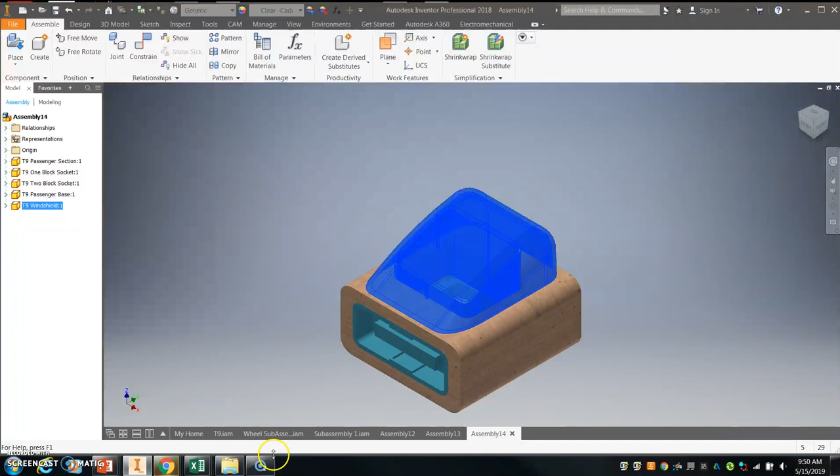Okay, so I wanted to just show everybody how you can actually assemble the third subassembly for the Automoblocks assembly. So first thing that I'm going to do is I'm going to place in the passenger base and the 1 block and 2 block sockets. Okay, so I'm going to go to File, New. I'm going to start a standard IAM assembly.

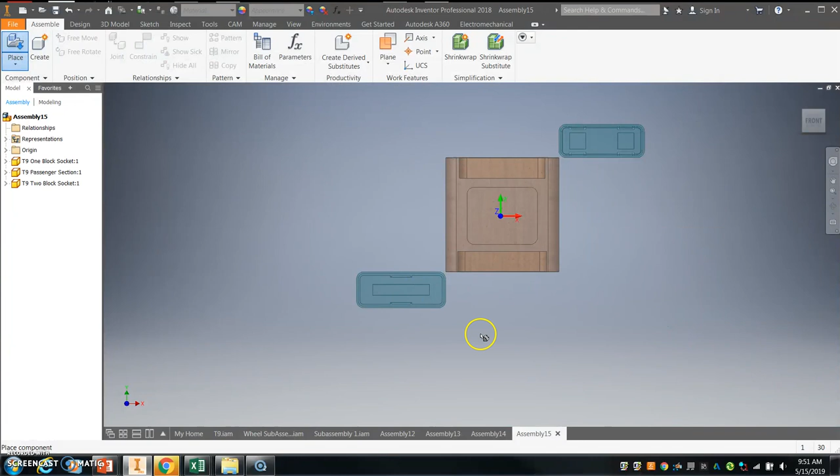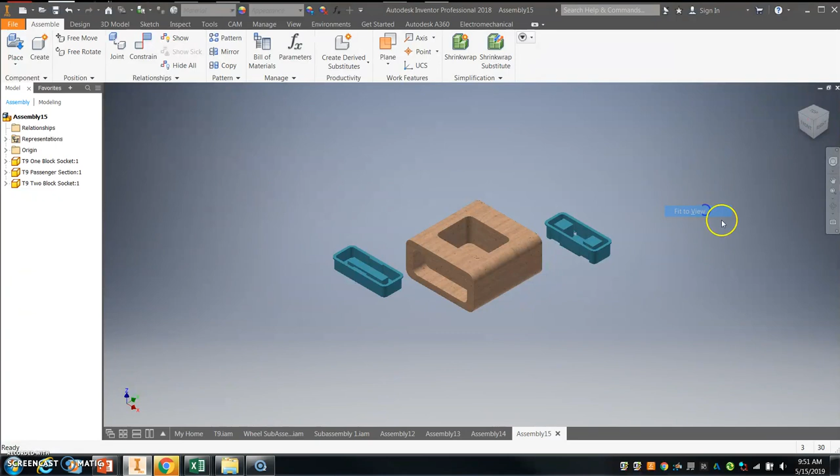I'm going to place the passenger section, and I'm going to hold the control button to get the 1 block socket and the 2 block socket, and I'm just going to place one of those. So if I'm looking at this, what I want to do is I want to make this the front of my vehicle. So I'm actually going to change the orientation. I'm going to set that as front. I'm going to click on the upper right hand corner, right click, set current view as home, fit to view. So now that will automatically size the passenger section right here.

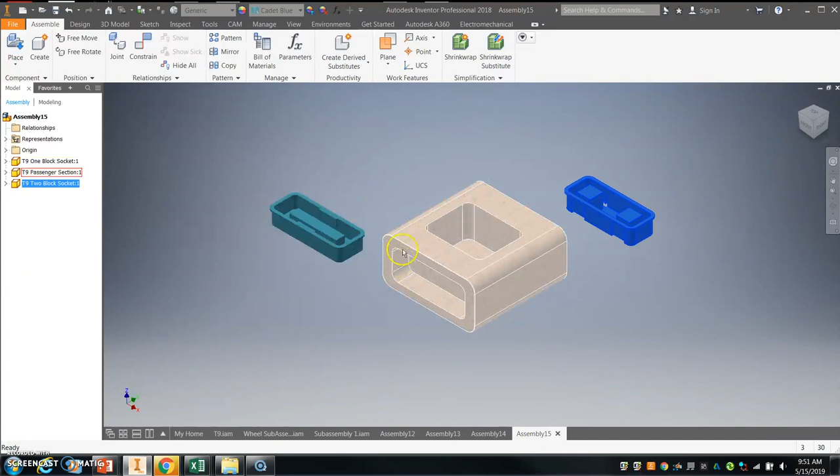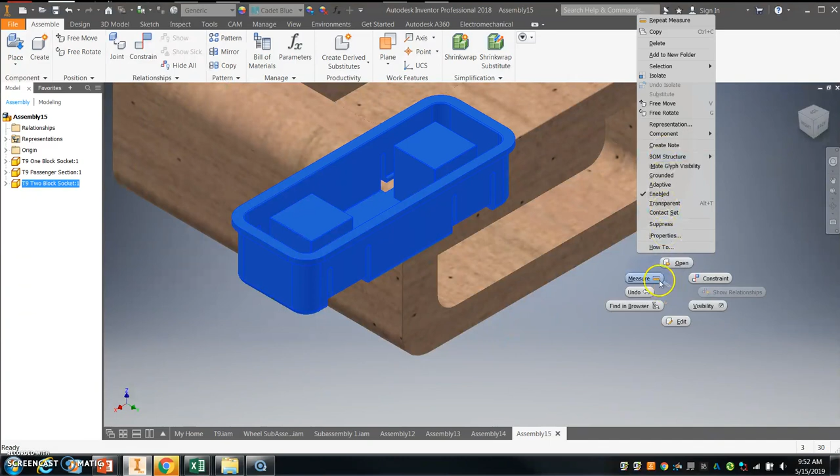So this 1 block and 2 block socket actually have two different sizes. So the 2 block socket is actually 2.4 inches across and the 1 block socket is 2.5. So in order to figure out which side each socket needs to go on, I'm going to right click, measure. I'm going to measure from here to here. And this is the 2.5 inch side, and I'm just going to double check, make sure that this one in fact is 2.4. From here to here, 2.4, perfect.

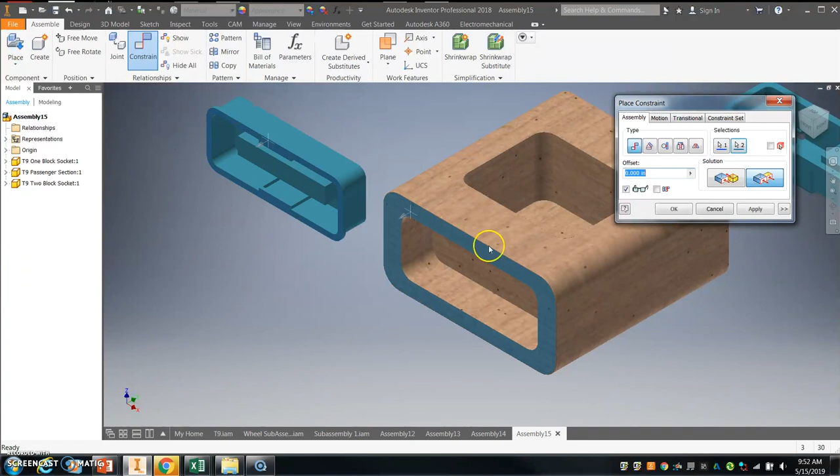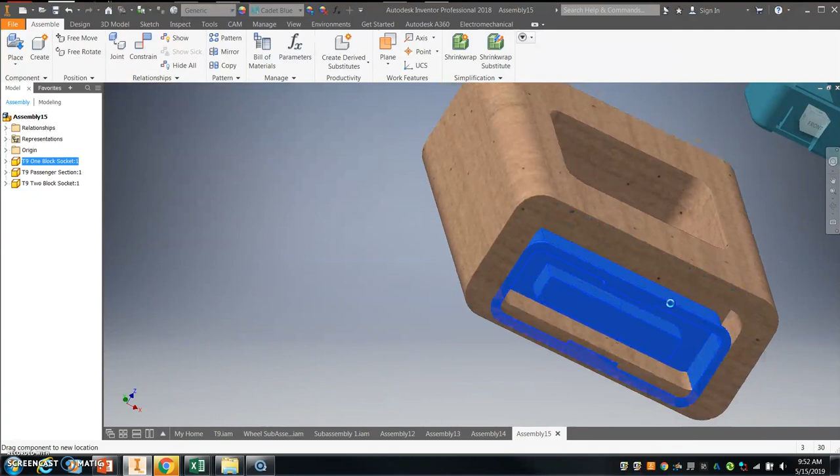So I'm going to place those two sockets in there. I'm going to start by doing a flush constraint. I don't actually have to rotate anything. I just need to make this flush with this. Okay. And then I'm going to mate this little edge here. I know it's a little difficult to see. So this edge right here with this inside edge right here. Hit apply. And now this should only be able to basically move up and down. I'm going to ground this one really quick. So this should be able to move up and down, and now I need to stop it from moving up and down in that Z direction.

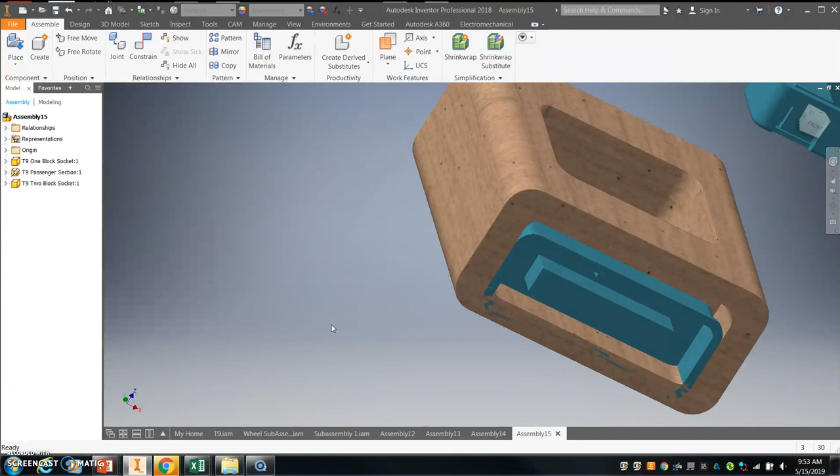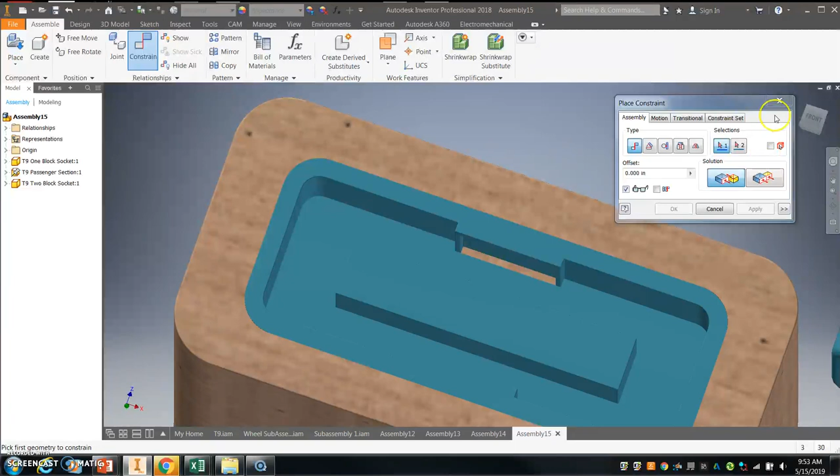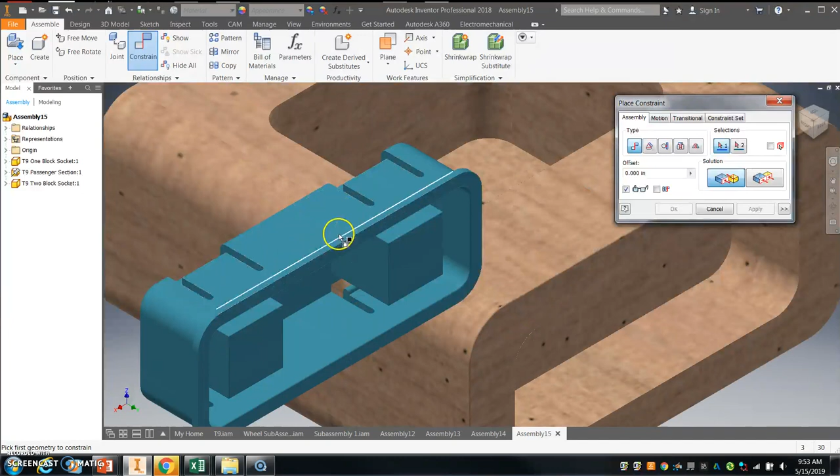The whole point of creating an assembly is so that way all of my pieces are constrained. They only move how I want them to move. And in this case, I don't want this connector socket to move anywhere. So I'm going to constrain this. I'm just going to mate this skinny little top surface right here to this surface right there. Hit apply. So theoretically, when I click on this, these should look like they kind of share the same outline right here. Okay, so that one looks pretty good. I'm going to do the exact same command for this side. And those should be pretty well set.

So next thing I'm going to do is I'm going to place the passenger base, which is the plastic piece. You might have the one with all the different shapes on it. That one's totally acceptable and it should fit. If not, you're welcome to download this one from Google Classroom. So luckily when I place this in here, the feet, we'll say, of the people are actually facing the correct way because the 1 block socket in this case is going towards the front.

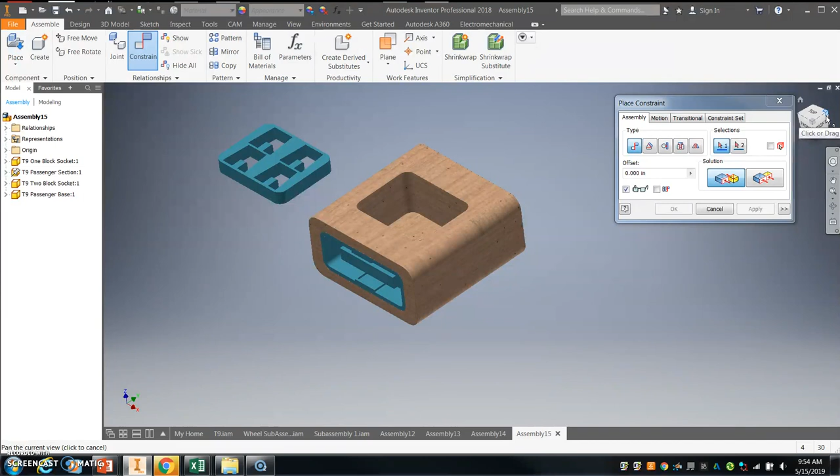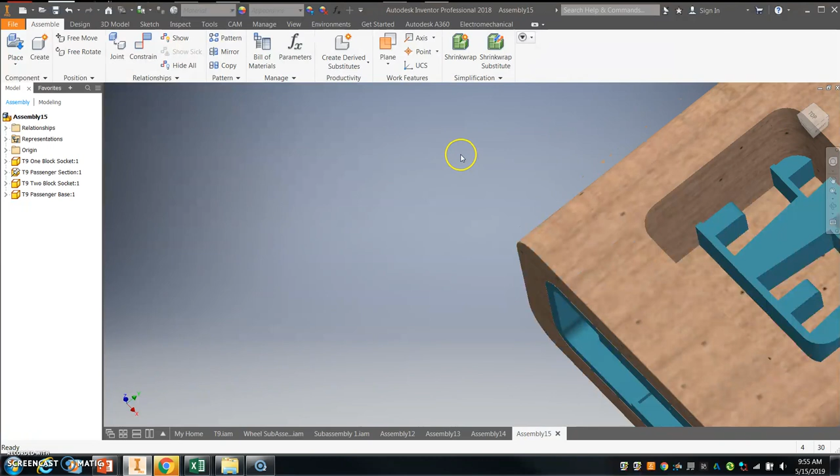So if I think about what pieces are going to actually be touching, where is there going to be a termination? Where is there going to be an end point where the parts can no longer go through? What parts are going to be touching when this is fully assembled? The bottom of this passenger section is going to stop the bottom of this passenger base. And no, it's not going to align it perfectly. It's basically going to say, well, you have one direction that has been constrained. In this case, that's going to be that Z direction. It can no longer technically move up and down in the Z direction. I need to constrain it from moving in the Y direction and in the X direction.

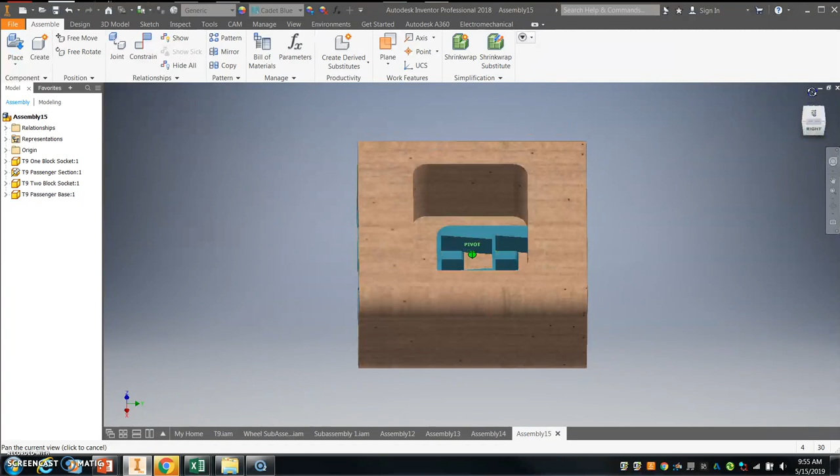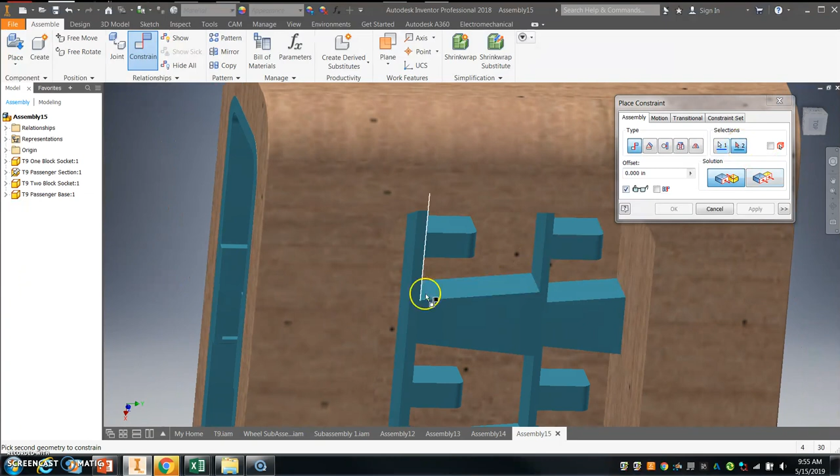And I'm going to do that just like I did with the other connector pieces. I'm going to constrain. I'm going to mate this side, oops, a little too far, to this side. And I'm going to constrain this side to that side. Okay, so I just did 3 mate constraints on there. So that took away all of those degrees of freedom, which is what we were looking for.

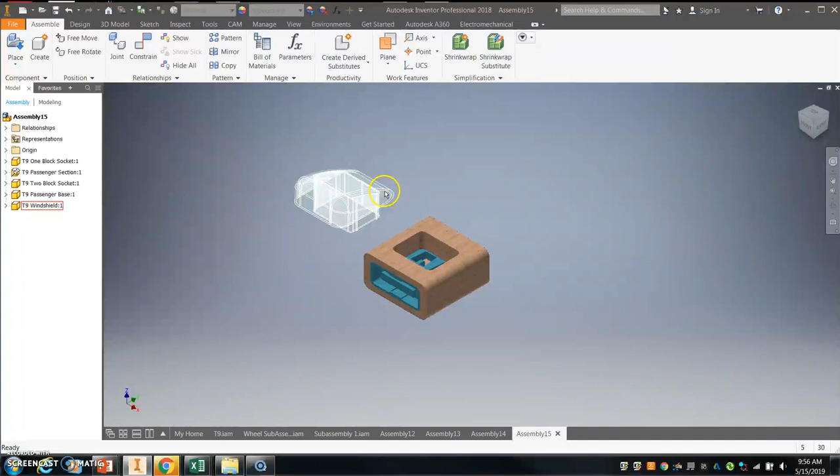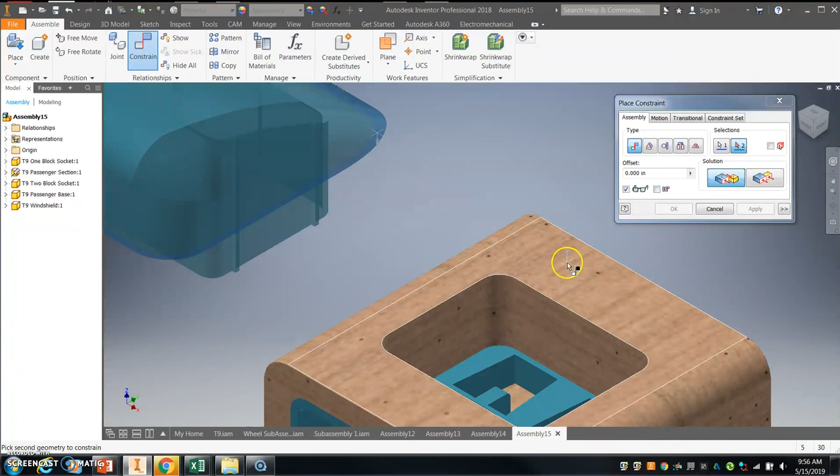So last but not least, I'm going to place the windshield in here. So I'm going to add my windshield and go to open. Okay, so the windshield, this narrower part should actually be facing towards the front. You don't need to rotate anything. If you think about it, when you place the windshield on top of the passenger section, basically the little tiny bottom along the windshield right there, that is what's going to make contact with this piece right here. Okay, so that looks good.

If I start to kind of look at this, what I might want to do is measure some stuff up to see how it's going to fit. So I'm going to go to measure the distance between this side and this side. If I look closely, that is 1.59 inches.

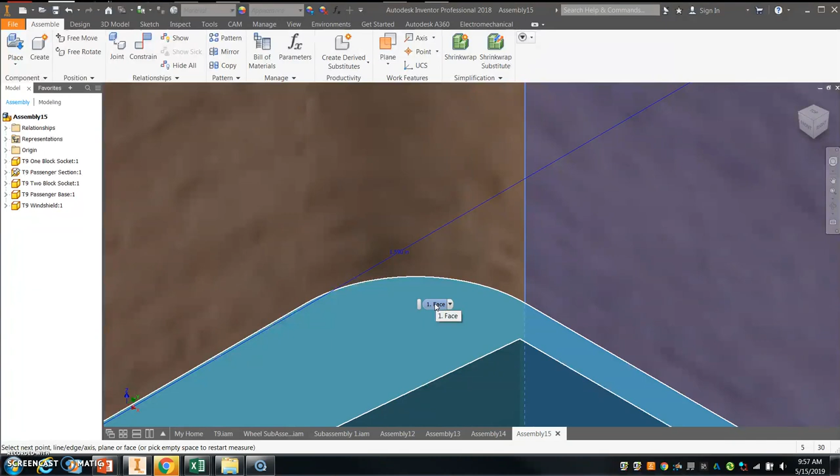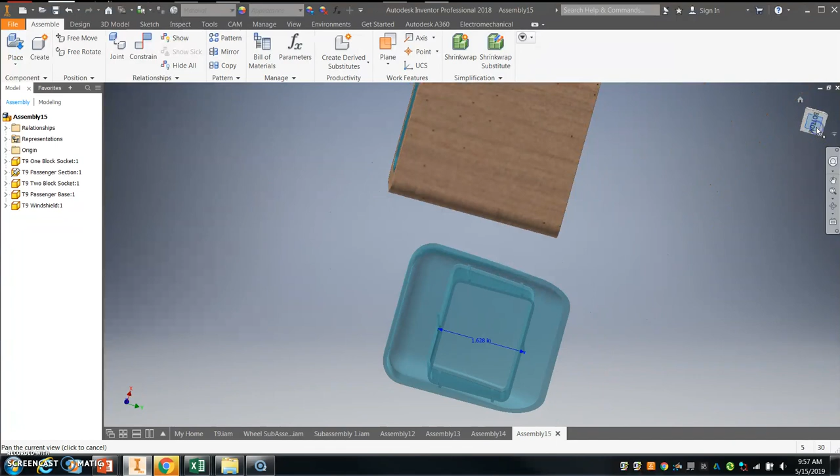So 1.59 inches. So let's take a look at the bottom of the windshield there and see. Right click, measure. Is it from here to here? That is 1.59 inches. Let's make sure that I'm looking at it. Okay. Or is it from here to here? Or is it from basically right here to right here? Okay, so that one's going to be kind of the closest.

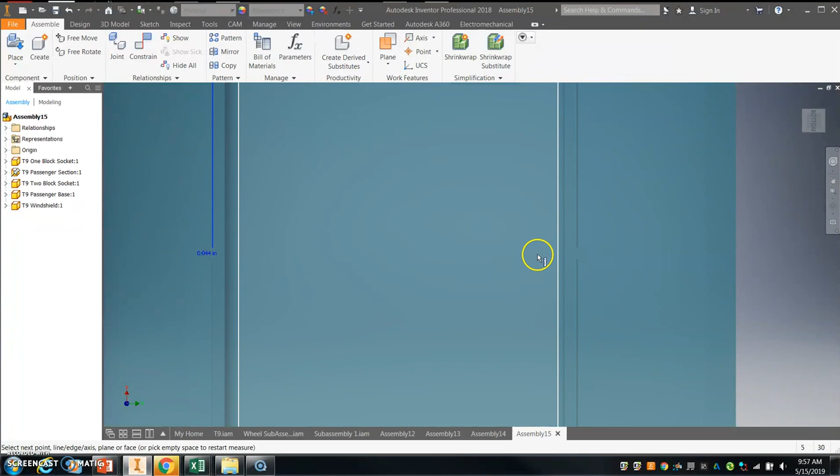So it looks as though these little tabs that sort of stick out, we might have to actually kind of place them. They might be inside of some of the pieces on here. So because the total distance from here to here is technically over. So that's at 1.628 inches. Right, so not a big deal.

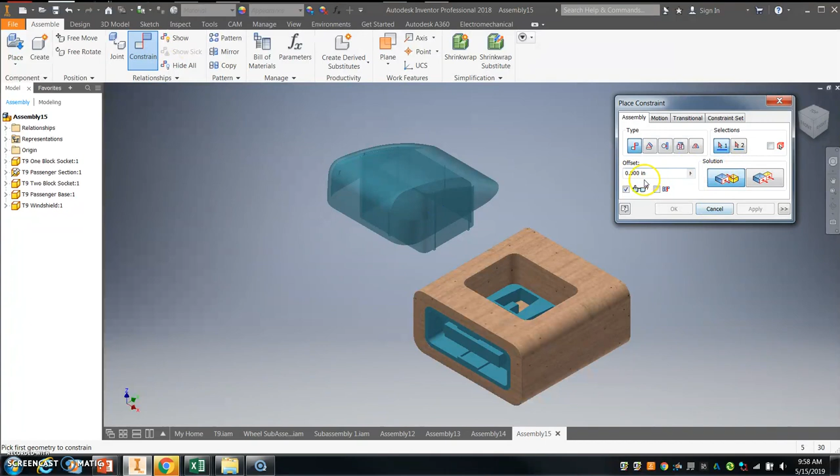What we are going to do is go back to here, and I'm going to constrain. So I want some of these surfaces, and we could even do a little bit of math and make it so it's even. I want this back surface right here to mate with this surface right here. And notice that that actually rotated, okay, this windshield for me. And then I hit apply.

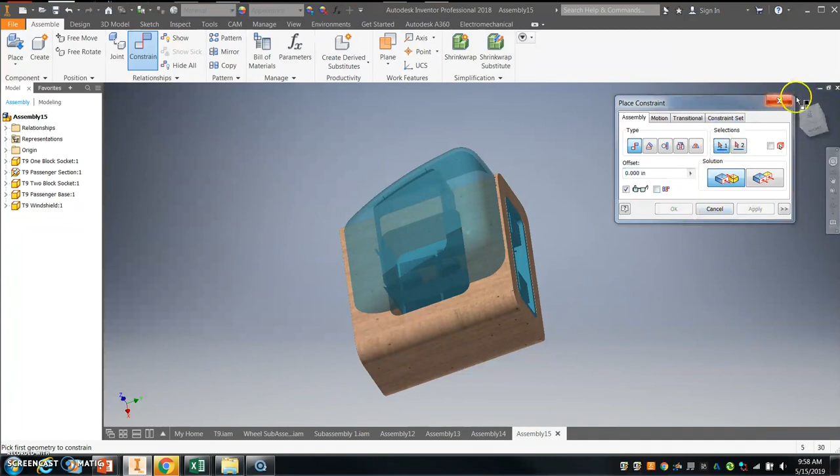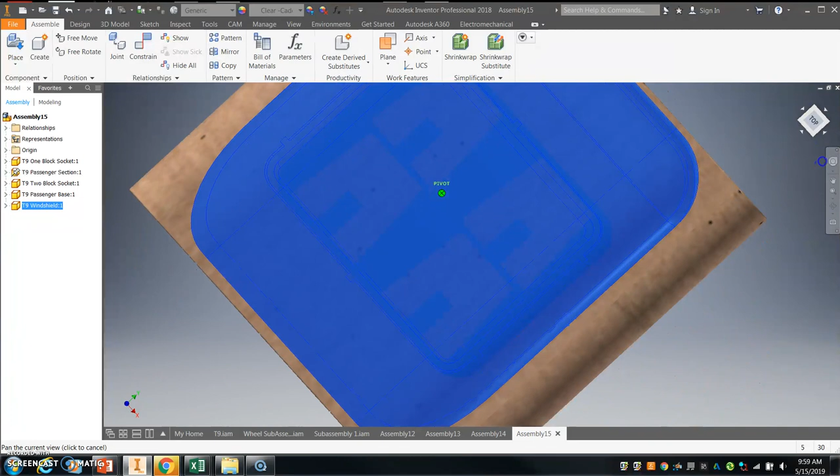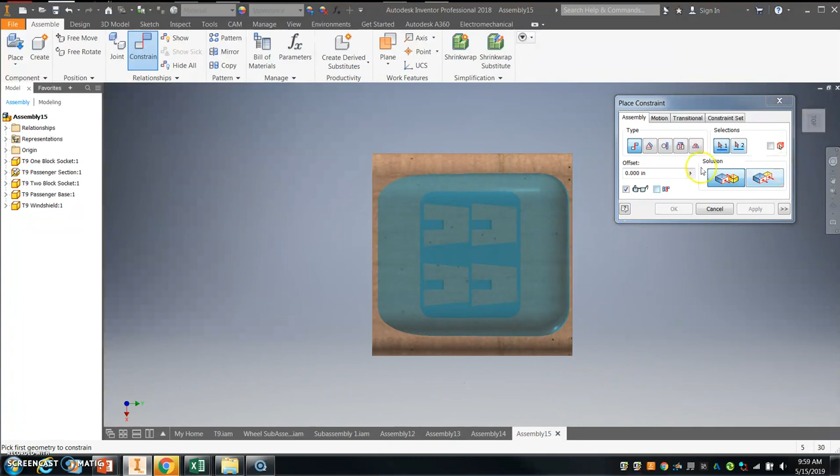So looking at this from the top, I should be able to move this back and forth. And if I click on this right here, it's a little difficult to see. But it looks as though it's aligned pretty well, and that will be acceptable for this. Next thing that I want to do is I want to stop it from being able to move in the X direction. So I'm going to constrain this piece right here to that piece right there. And I'm going to hit apply. So if I look at this from the top, that looks pretty good, looks pretty even.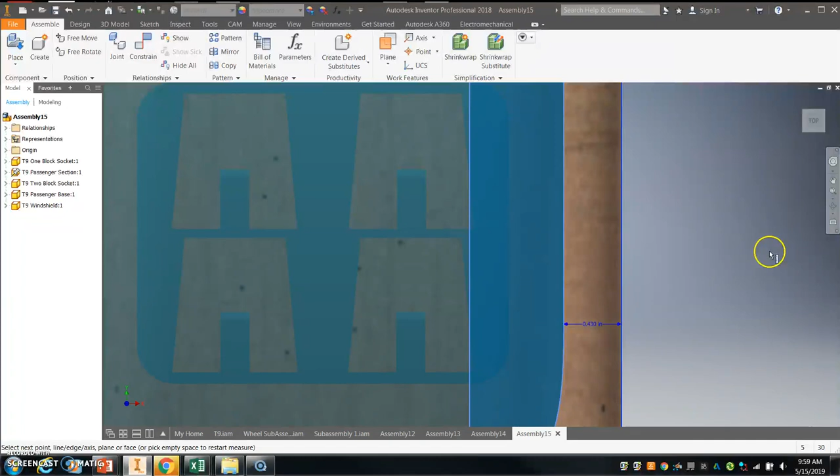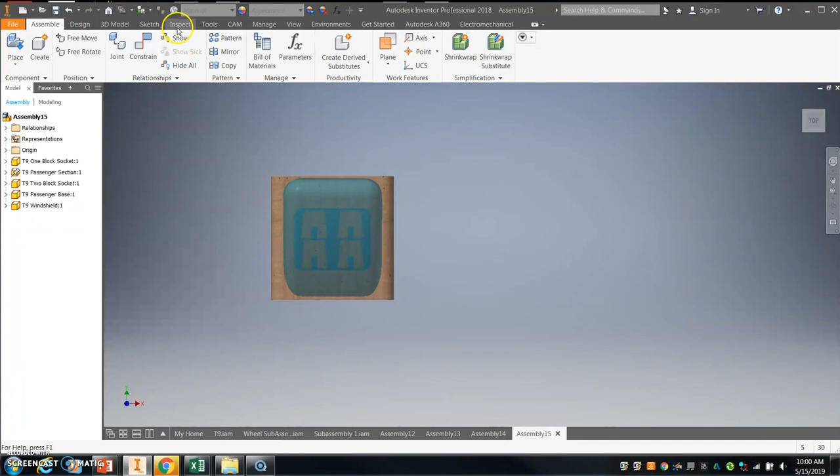What we can do is we can actually right click and hit measure from here to, I zoom in, trying to get this piece right here. So 0.43 inches. And then if I measure from here to here, oh, let's try that again from here. Right click, okay. Measure from this edge to here, 0.433 inches. Okay. So that's pretty good.

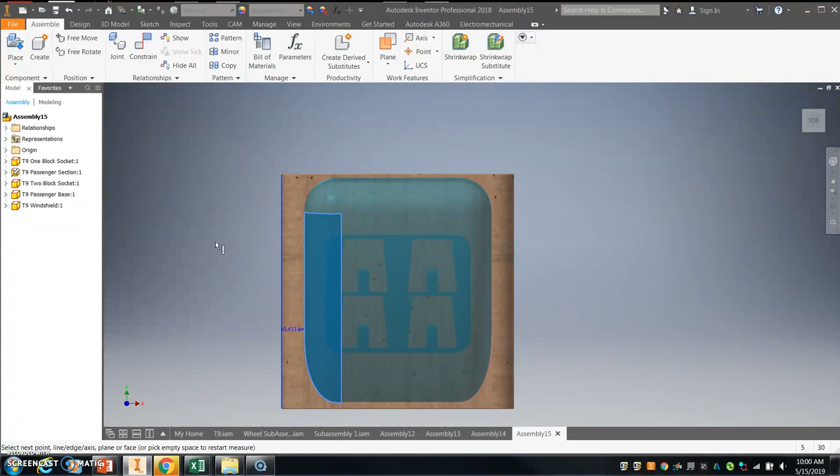That's only off by three thousandths of an inch. So we're not going to worry about that too much. And the windshield right here looks pretty good. So the windshield can no longer move in any direction. So I would call that fully constrained. From here, I'm going to hit Control S to save. Sub assembly 3, I believe it is. And hit that save button.

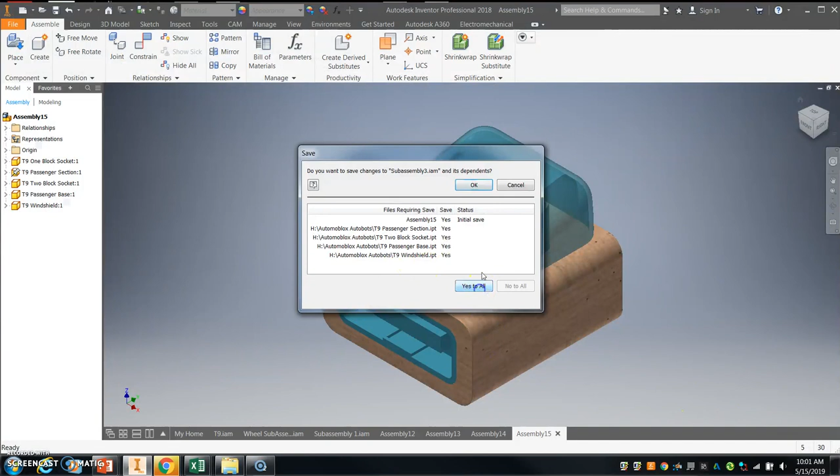Okay. So that looks pretty good. I'm going to hit yes to all because I want all of them to be updated and saved. And I'm going to hit OK. That works well because they're all in the same folder together. So now everything has just been updated. All of these individual part files have been updated, and the passenger section, this whole subassembly, has been updated.

So when I go to place my final assembly, I am going to put in my subassembly for the bed right here, the assembly for the passenger section, and the assembly for the front. So I'm going to open that one up. I'm going to place that. Okay. I'm going to place the next one, which is this one right here. And I'm also going to place one of the connectors.

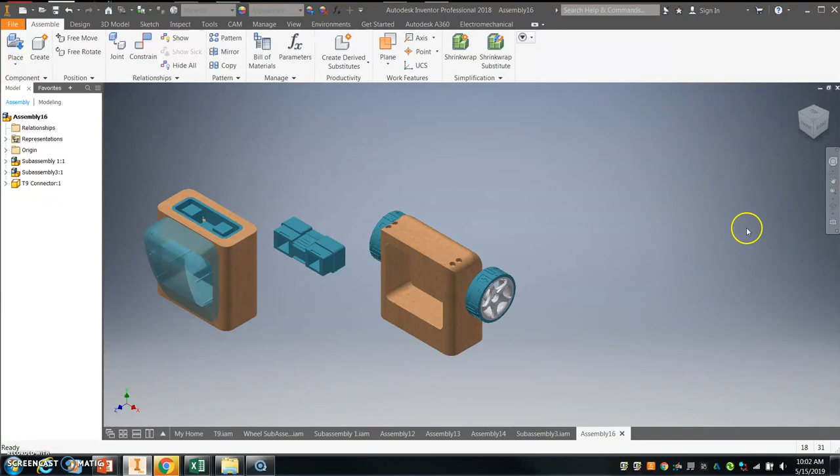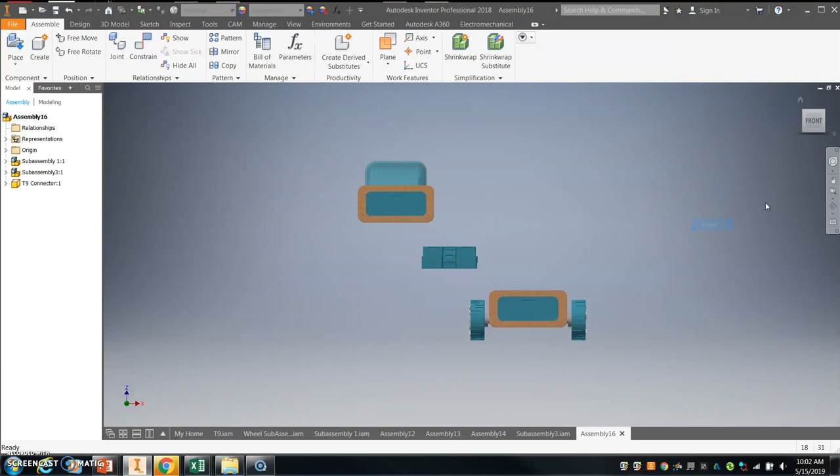Okay. Notice I'm not putting all of the parts and all of the sub-assemblies in here at one time. What I'm trying to do is keep myself a little bit more organized, and the more stuff you have floating around, the easier it is to get lost. So I'm going to make this my front view. Oops, not that way though. Make sure that it's at 90 degrees there. Set current view as front. Right here, right click, set current view as home, fit to view.

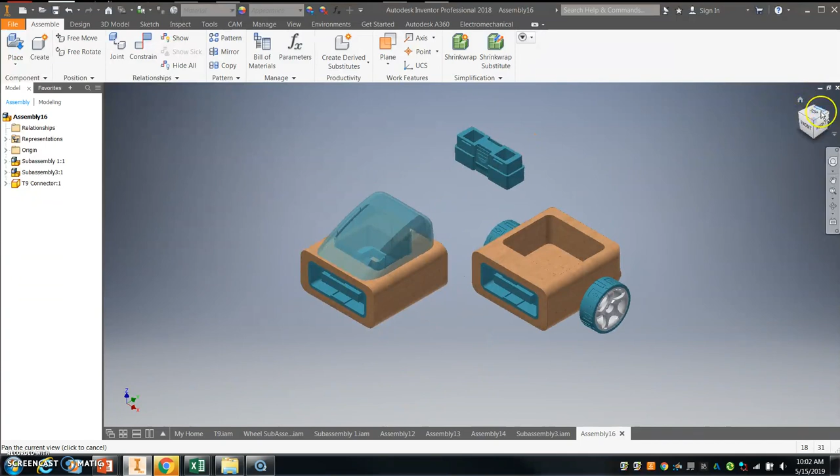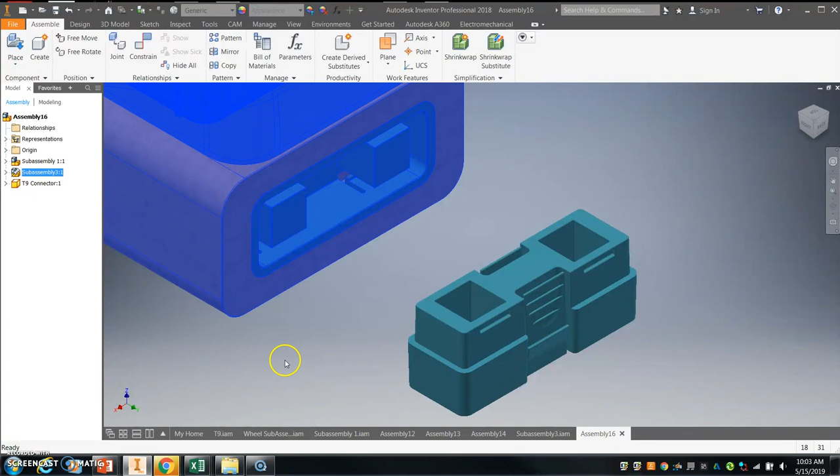So now what I'm going to try and do is actually start to connect these. Okay, so if I go to my top view right here, this looks pretty good. My home view. I'm going to connect this 1 block socket to here and the 2 block side to over here. So I find it a little bit easier to do the 2 block side first. So you might have to just do some finagling and moving things around. I'm going to ground this one right here, my passenger subassembly. And I'm going to constrain by mating this piece right here to this piece right here.

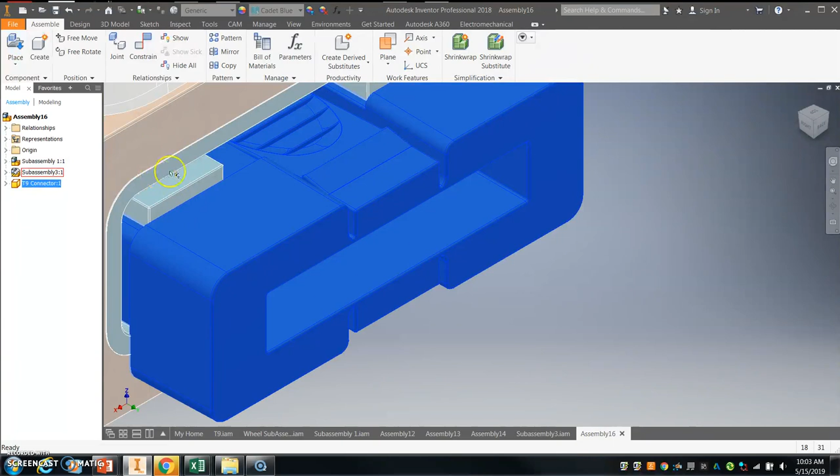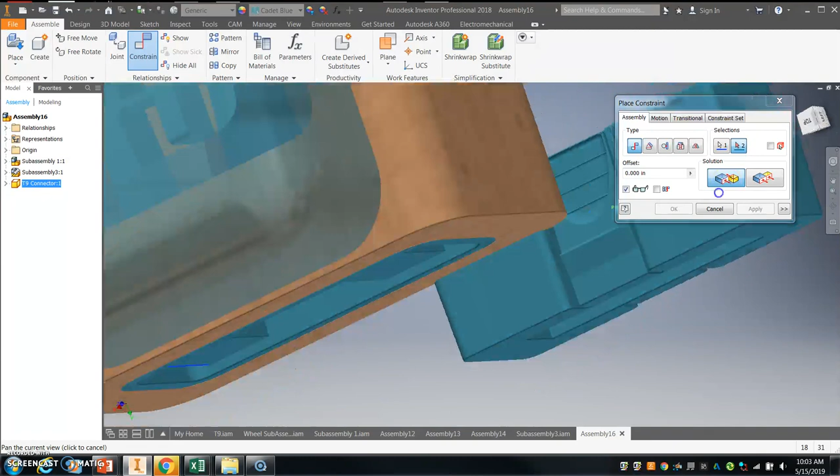Because when you actually assemble this, if you look at the vehicle that's available for you to kind of examine, you'll see that this piece right here stops at this piece right here. So those are the 2 pieces that we want to constrain, where they terminate, where they end, where they connect. That's where we want to constrain. So once again, like you saw in a previous video, I'm going to use the mate constraint for an edge inside of the 2 block socket. Okay, this is where it gets a little bit tricky because I need to keep my wits about me, and I need to make sure that I choose the correct side for that constraint.

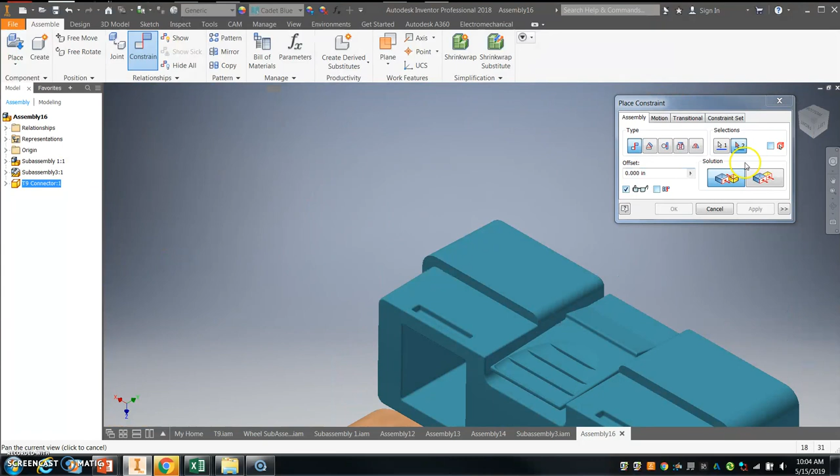Okay, so that looks pretty good. It should only be able to move in the Z direction in this case. Same thing. I'm going to use just the same cube. I'm going to use an edge, and I'm going to rotate this and make sure that I use the top piece. Hit apply. Right, and that one should look pretty good. That shouldn't move. So I'm going to constrain this kind of the same way.

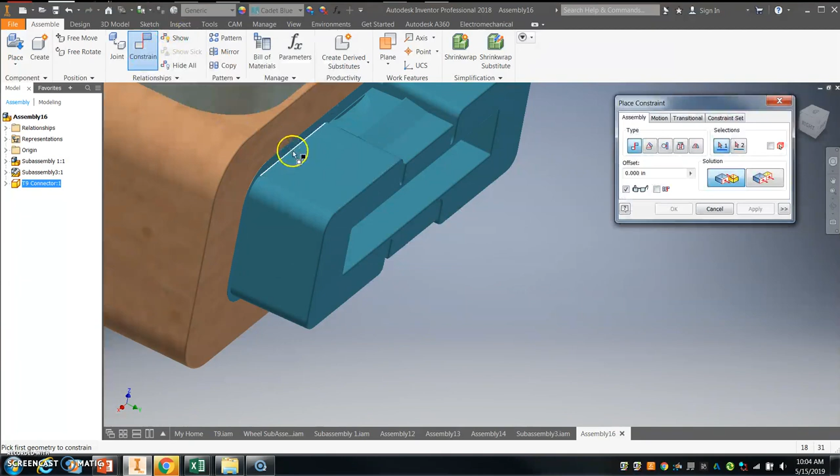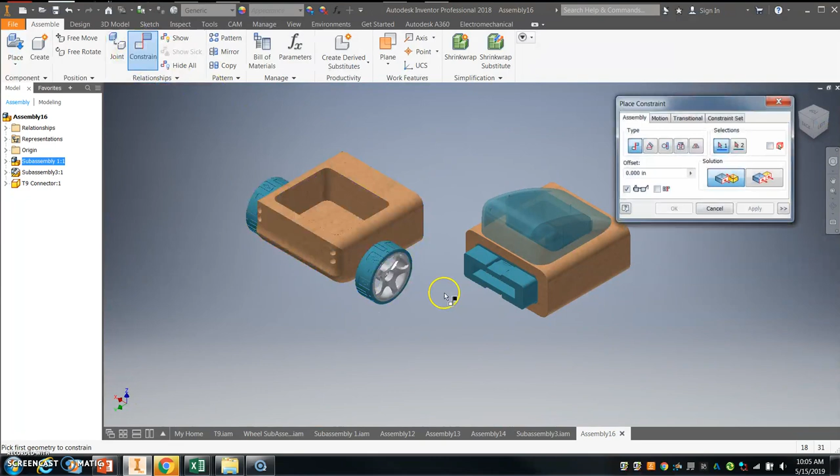So when we connect this, theoretically, I'm going to flush. Actually, I should be able to mate those because these should fit together. So I should be able to mate this piece right here to this piece right there, because those are actually going to connect, right? I can move these out of the way right here. And I'm going to just use that same edge theory. So I'm going to use this flat piece right here and the edge in here. And then do the same thing on the top and bottom.